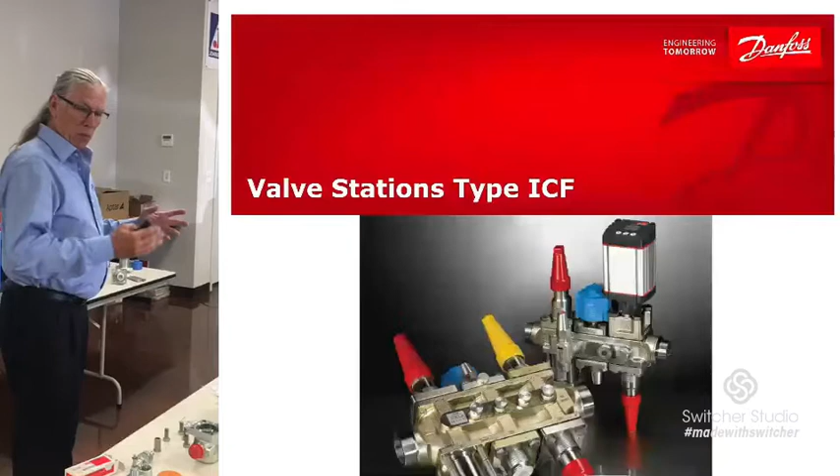Sometimes they call it modular block valves. We call it ICF valve station because it's Danish - there's something in Danish that those letters stand for. Somebody tried to make up something that makes sense, but to me, integrated is a good word because it integrates multiple functions all into one. But ICF valve stations is the best I can tell you.

So how does it work and why do we do it? Well, simply put, the normal would be all of those components with either flanges or threaded or individual connections, typically with ammonia and CO2, all the way across there. So how many leak points do you have there?

And then down below is our ICF valve station. You've got the modules that are bolted in, and then you've got two weld connections to put the valve body in. So although you have other leak points, you eliminate with the two welds - you simplify it and hopefully eliminate the two basic ones you want to eliminate.

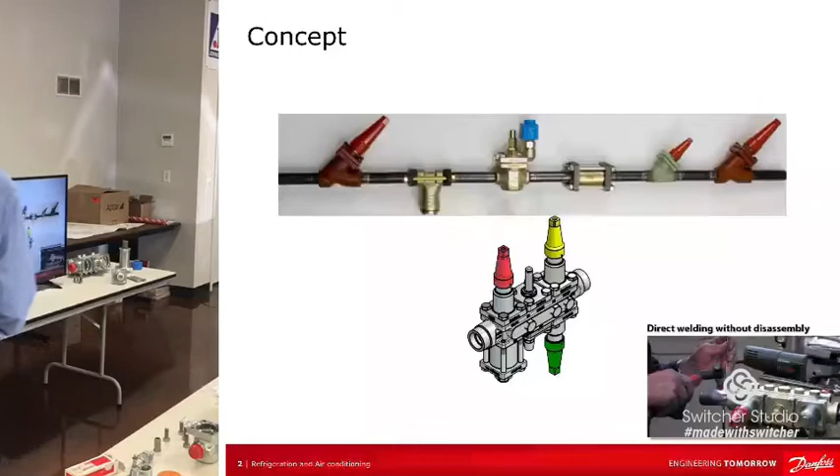Then yes, you could have a leak from a module - that is possible, but it's easily replaced, a gasket. It's really actually rare in my opinion, if everything's done right and put together correctly. So that's the concept.

So here is our family right here. The smallest, the 15, then the 20, the 25, and that's the metric, so you're talking 3/4, half inch, 3/4, 1 inch. The 50 is essentially 2 inch, and the 65 is essentially 2.5 inch.

Our two largest ones, the 50 and the 65, have been introduced recently. Keep in mind that is the module port size, so the connection sizes can be different for each one - can be anything from a 1/2 inch through 3 inch connections, depending on the particular one and what you're trying to do, within reason. Obviously you're not going to have a 1/2 inch connection on an ICF50. It's not happening. So you get the gist of that.

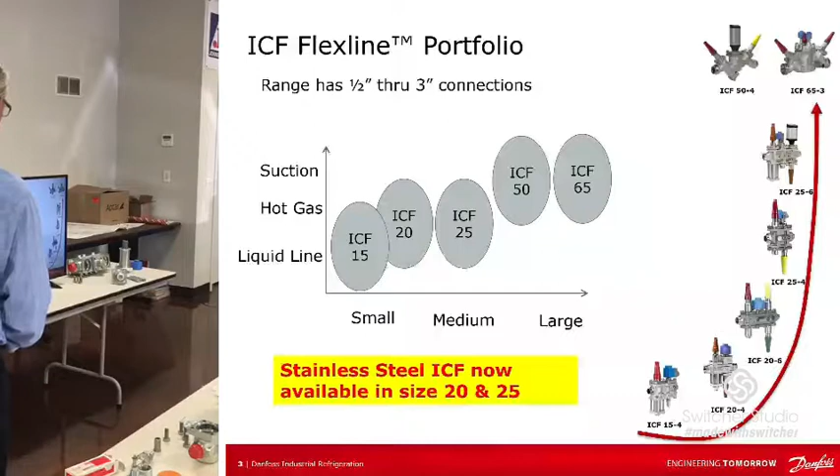Here is just the flow and the side port locations. I have one up front here around lunch area - it would be best to look at around lunch because it's so big. I'd encourage you to look at it if you want, but I'm not going to pick it up or bring it to you. It's just too heavy, but you can see it from here.

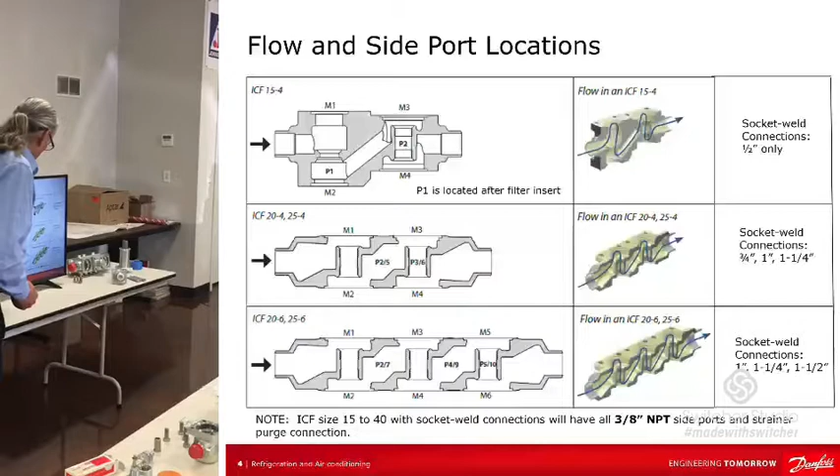What I have over there is an ICF 25-6, which would be this particular one right here. It's the most common in large jobs that I see, and you can see the flow from inlet to outlet. The odd modules are on top - M1, M3, and 5. The even modules are on the bottom - M2, M4, M6. If that was just a 4, then it would be M1, M3, and M2, M4.

It's that simple. The side ports there are called the P ports, and it shows you kind of where they are. In most cases, the P ports, the side ports, are going to be in between modules. Occasionally, one of them will be at the module.

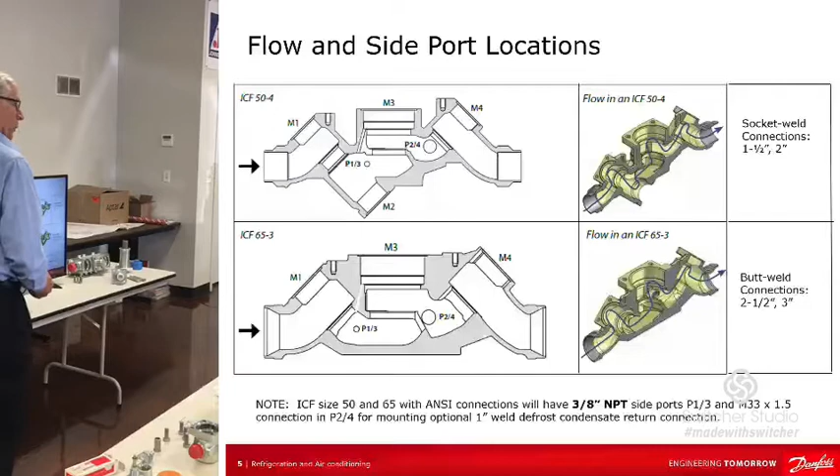And then the large 50 is up to 4 modules, and the 65 is limited to 3. So just as an example, this is typically what happens - here on this one, which you can't have here, you can add a filter strainer to the M2 location. Here you would have to have a separate large strainer for the 65.

Starting with the small ones, the 15, it's kind of a morphed body - you can see it kind of looks a little weird there. The size of it required that, and the fact that we're trying to use some of the same modules from the SVA line, just in this particular case.

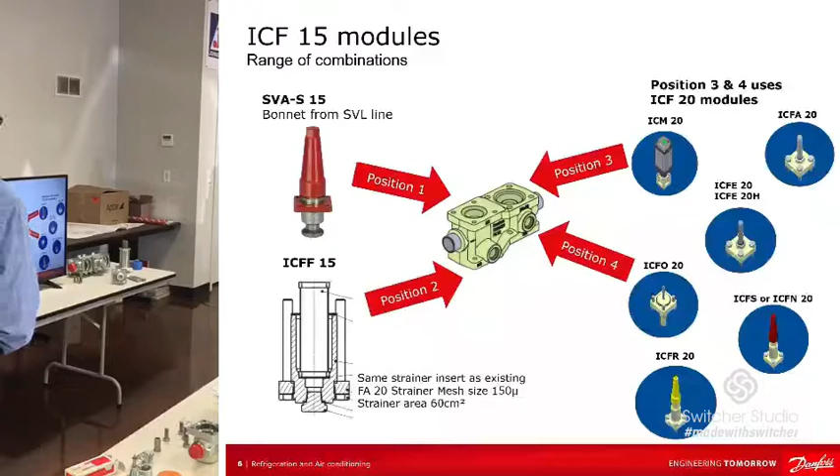But the point is, on the 15, you can have a stop valve, and you can have all of these others. The nomenclature is pretty simple - so a stop is an ICFS, S for stop. Then you've got ICM, Motorized Module, we'll talk about that one later - that's a separate item in our line. We've got an ICFA, which is a solenoid.

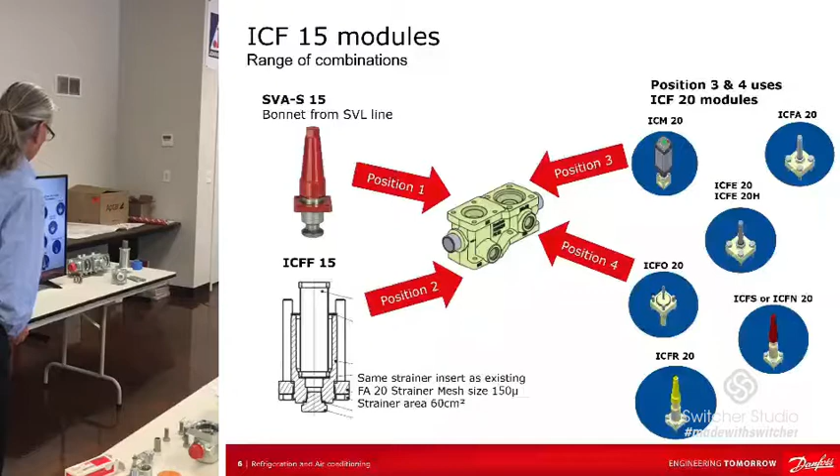That's a pulse, then ICFE is a solenoid. The O is the manual opener. S and N are stop and stop check. And then ICFR is a regulator. So that's what can go into this particular one, the 15. And you can see how they do have to go in specific locations in many cases.

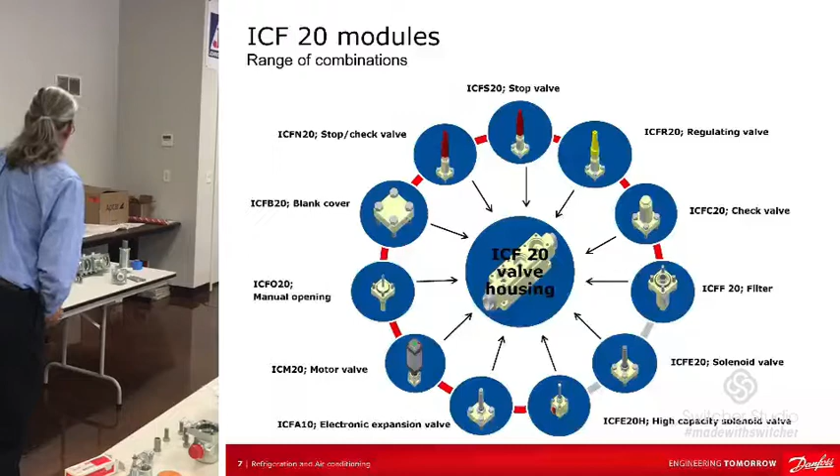Then the 20 just increases. It's got a few more that we didn't talk about, I'll try to point those out. Here we go, high capacity solenoid. We do have the filter in the other one. Check valve, okay, so that's another one. Check, ICFC, and everything else, and there's another one, a blank.

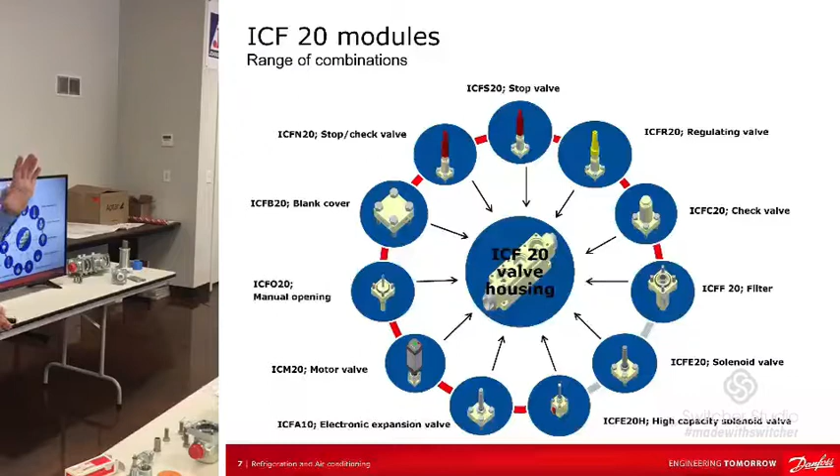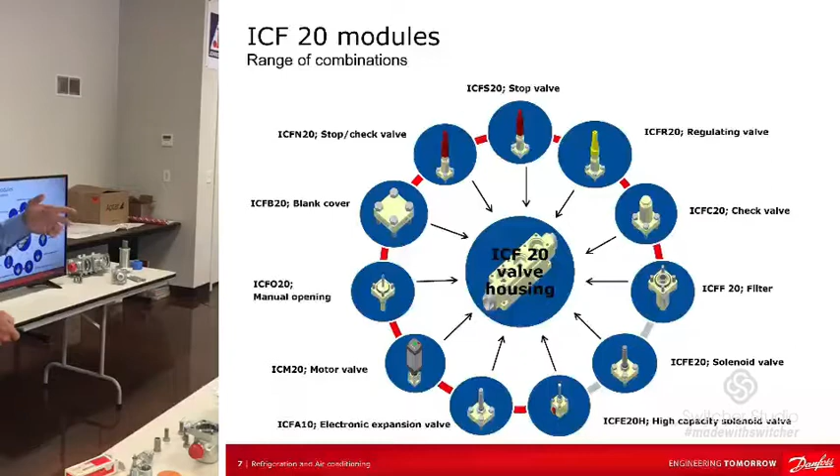Okay, so let's say you need 5 functions, you just have to have 5 functions. Then you're gonna have to use an ICF 20-6 because we don't have a 5. So you're gonna have 6, so just put a blank cover in where you don't need the functionality.

And the 25 - we used to have what was called a 25-40, the 1 inch. Remember I said the connections can be pretty much what are needed within reason, so we did away with the range between 25 and 40. I need our slides updated, but suffice it to say today we only have ICF 25. There is no such thing as a through 40. It's basically the same because we give the variable connection sizes, and the port size is always going to be the ICF 25.

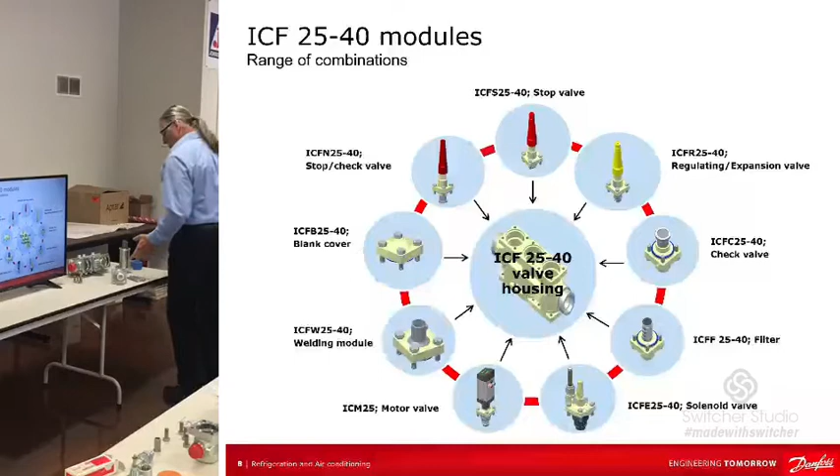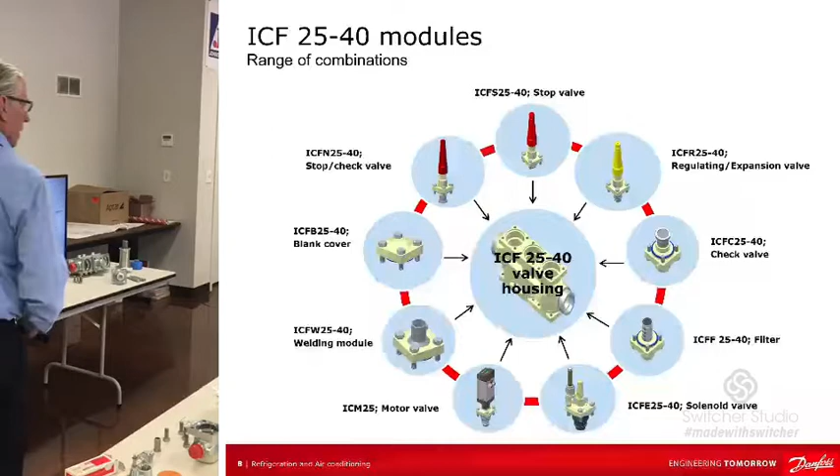Here it adds another one. So you see this one, this one's pretty interesting, but only for the 1 inch. It's called a welding module. It's pretty cool. If you think about it, let's say I were to put on the outlet, which is this end - because this is socket weld, I could put an outlet here. I could also put an outlet up here, and I could pipe away from that thing and do something. I've got an example of one. It's pretty crazy, and people do all kinds of stuff with them. So it's just a way of bringing the refrigerant out at a certain place on the ICF valve station.

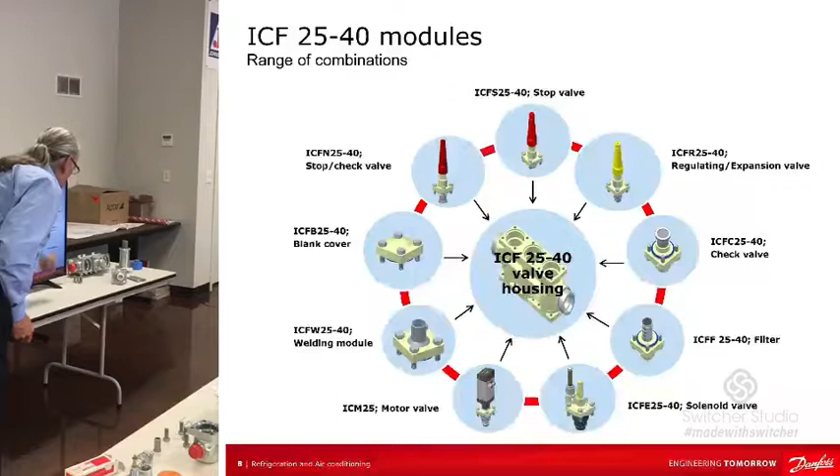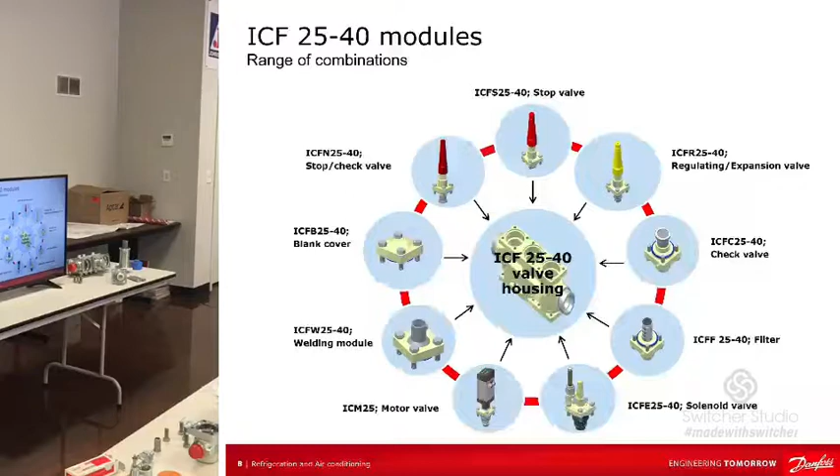Oh, the one I told you about, the unique 25 solenoid - it's the one with the armature to the side. The reason for that is the size of that valve and the fact that the manual opener comes built into it. The other solenoids have the valve in the solenoid at the top, so the manual opener goes down below it, and you can't put that anywhere else. I've actually gotten that question before from the field - can I put the manual opener anywhere in the valve station? I'm like, no, you've got to put it underneath the solenoid, otherwise it won't work. So just something to know.

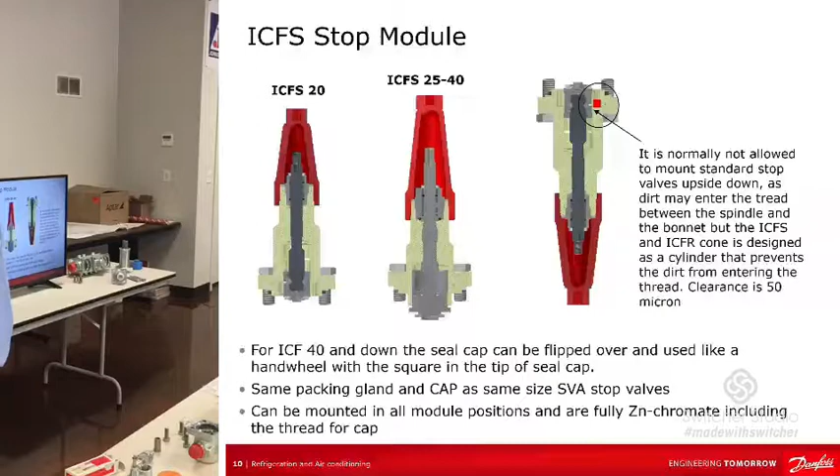You might ask about these modules for the stop valve - they're unique to the ICF valve station. The ICF15 is the only exception to that, but the reason for that is because you can mount this upside down, and we typically don't want valves mounted upside down. So in this case, this is a special valve with a specially designed cone, not like our standard stop valve. It does use the same packing gland as the SVA line, but the valve itself is not the same, so it can't be substituted. So what I'm saying is this is an ICF stop valve, and it has to go in the ICF valve station - it can't go anywhere else.

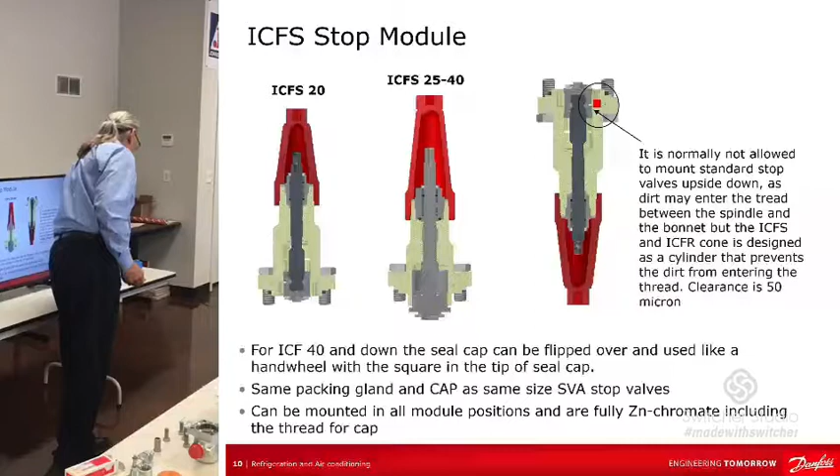So regulator, okay, it's again, same packing gland. We talked about V-port regulation.

That's how the regulators work throughout our family of valves, pretty much. Can be mounted in any location. Regulators are typically, that's the way it works with ICF. Regulators tend to be at the end, generally, that makes sense. And stop valves will be at the beginning, and if you're not doing stop check or a regulator, it'll be at the last position, just to make isolation of the module, of the valve.

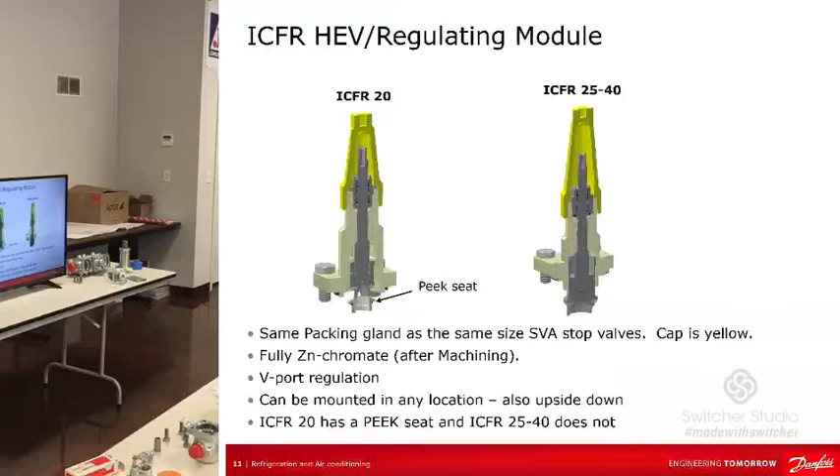Let's see here. Seal caps, we don't need to cover this because really I've already talked about it. They just need to be, we like people to use them, put them on. I see them on the roofs, usually they're upside down, they're all over the place. It's just best to have them on, tight, nice and tight, and kind of keep up with them. There's a torque related to those caps, and that's in our literature.

Okay, we talked about reversing it to use it to drive the valve, and the color coding of it. The filter modules, we have two: a standard and an extended. Today, pretty sure we've gone standard with the extended module in the ICF valve station. It's something that we've done, and like I told you earlier about the pleated, we standardize on pleated in certain applications. We recommend it and standardize on it.

Okay, so there's a drain plug. It's a 3/8 inch NPT. So typically what we see is that they would get a 3/8 gauge, or valve, gauge valve, or purge valve, and they would use that and install it into that, so that when you isolate the valve station, you want to clean the strainer, you're going to purge after you isolate, and then you're going to take the strainer out.

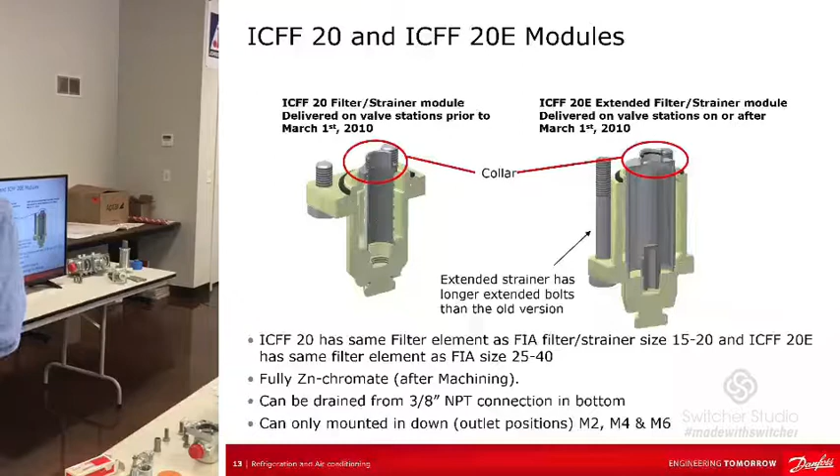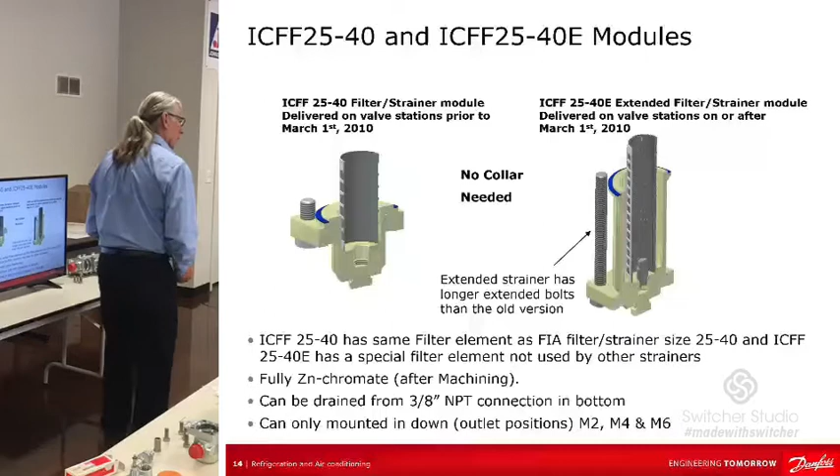Can only be mounted in the down position. We already talked about that. And you can tell the extended, I forgot to mention this, but you can tell the extended filter, the bolts will be long. On the standard, the bolts are going to be really short. You can see that in the picture right here.

Okay, and I'm not going to go into the micro details of sizes and parts and all that stuff. It's more, just knowing that it's stamped on the side, like I showed you, what they look like, that we have standard and pleated. Those are the things that I think are important for you guys to know.

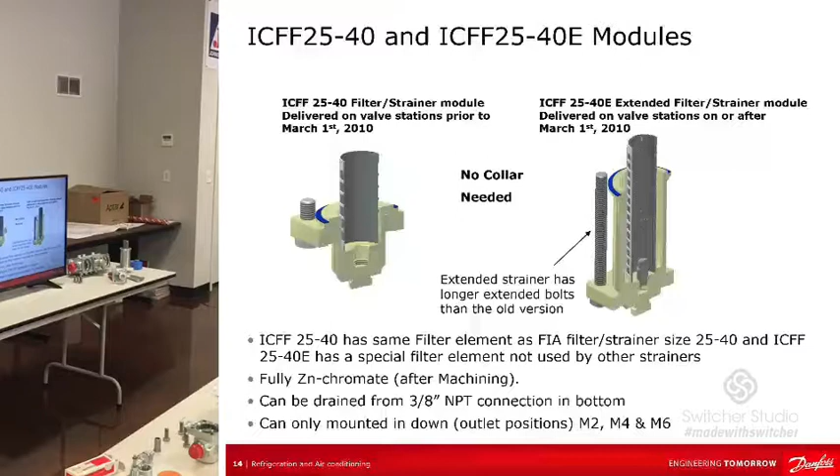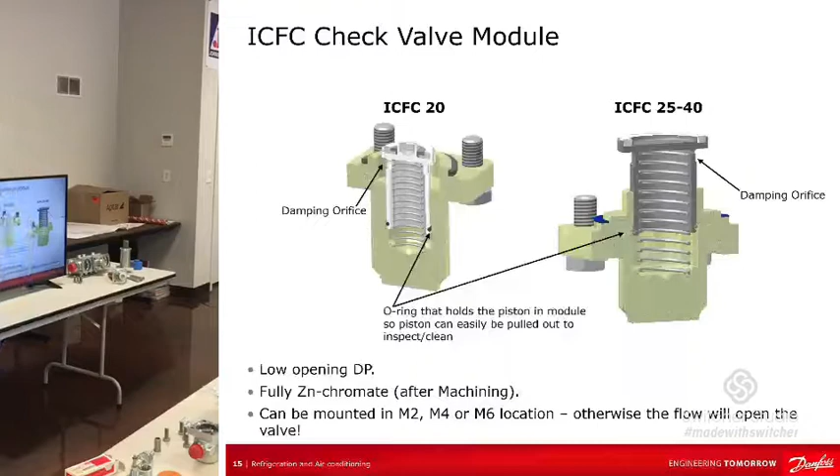Check valve is very similar to the CHV and the SCA. You can see that, the piston, the damping orifice hole, the spring, all of that. I mean, it's pretty much the same. Low opening differential pressure, just like the CHV we were talking about, almost a half a PSI differential. Again, mounted in M2, M4, or M6. Otherwise, the flow is going to have a tendency to open that check valve, and that's not what you want.

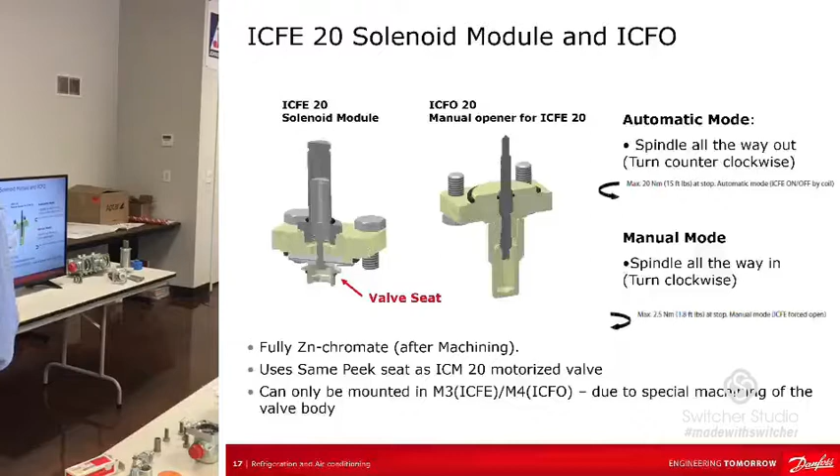And you see the automatic and the manual mode there. It's the standard, this is kind of unique. If you ever run into one of these, I get people who either like these things or if they don't, they hate it, and I don't really know why.

It's a high capacity solenoid, so it can be used with the ICF 20. It's unique in that it has a built-in opener, but it's not like the one on the 25. You can see the side picture here. It's a red colored cap with a gasket underneath it, and when you screw that out, it uncovers an Allen head.

The two things I hear are: now I gotta have a hex wrench with me to operate that thing, and couldn't you have put something there you could just take your hand and move? Well, the reasoning is you don't want it to be operated that easily. You want somebody to be doing it for a reason, it's a tool thing. It's just the thinking of an engineer designing this, I guess.

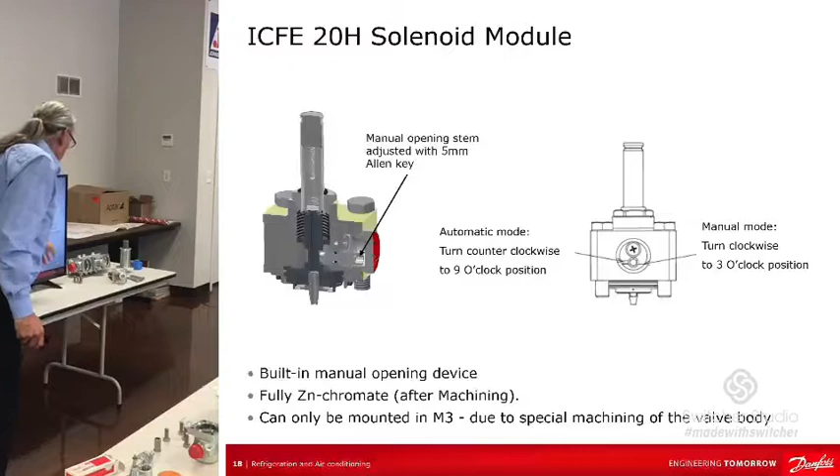The other thing is you can easily break that thing. It only turns to the 3 o'clock position, so it's at the 9 o'clock position when in automatic. To do manual, it's clockwise to the 3 o'clock position only. So what'll happen is if you get in a hurry, put your hex head in and just twist it, well if you're a strong fella, you're gonna break it.

Unfortunately it's happened, we see it. It doesn't take much. You can break, and I don't mean the hex head, I mean break the internal manual opener part. So now you know what you're gonna have to do, you're gonna have to replace the whole module. It's happened, just be aware of that.

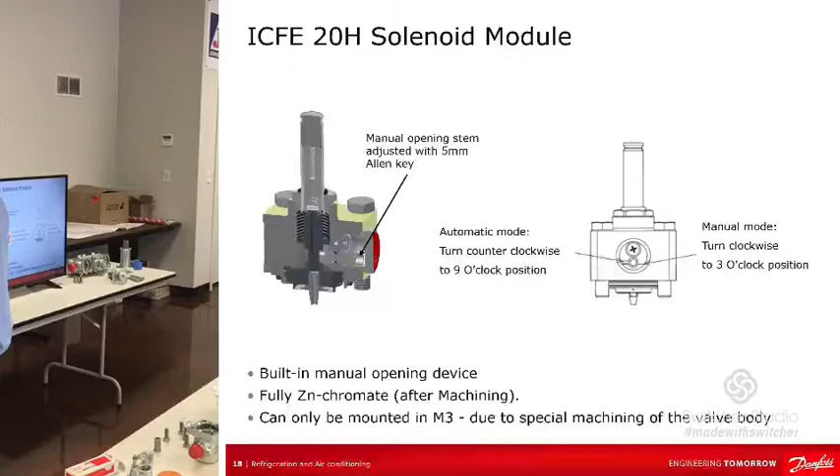Again, this is a solenoid module, so it has to be mounted in. That's one thing that's common throughout this. There's the special one we talked about, it's backwards, okay, just keep that in mind. Again, only M3.

In a way it is, because you can see that the solenoid is off to the side, it's kind of a pilot operated type arrangement. It's not direct acting, it's pilot operated.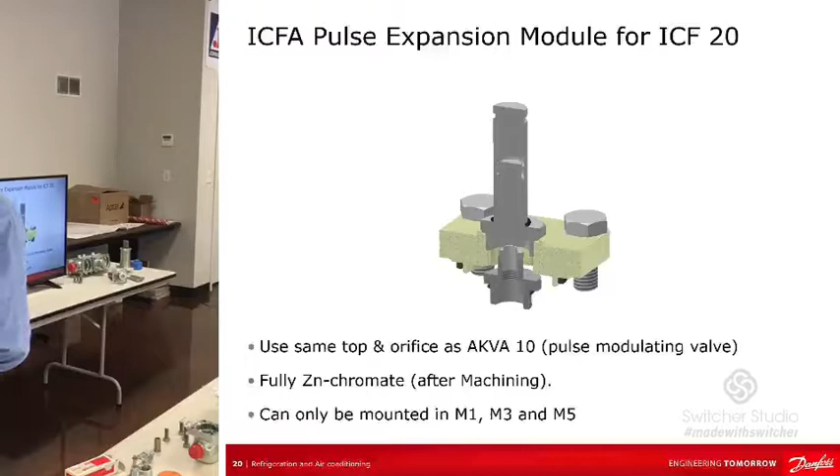And this is one we haven't talked about, but we'll talk about it separately shortly after lunch, the ICM motorized valve. So what's unique about our valve station is that there's so many different things you can do, including looking in the future to being able to do ICS on the small ones. And I haven't talked about this, but there's limitation of what you can do with the 15, 20, and 25 valve stations with ICS, okay.

So ICS pressure regulators, but you can do those across the board with the large ones. The 50 and the 65 are very flexible. They're working on the small ones, there's just some challenges. Really, I think one day they're gonna come with it.

So it's gonna be pretty neat because a lot of people like the fact that we can also do the motorized valves on the valve stations, and it is pretty cool. Because let's say you're wanting to do liquid injection on a compressor. That's common with compressor manufacturers, they really like using that valve station. It has everything they need in a motorized valve to feed the liquid. It really is nice, and typically those don't get very big generally speaking.

So it's working today, but there's a lot of applications where having regulators for the small would be good, because we already have it for the large ones.

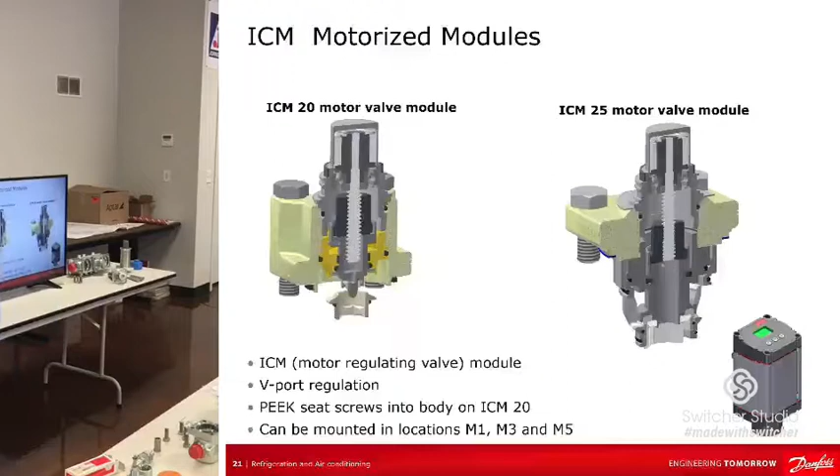Okay, this is one that you may not see, and you may not ever see it. I don't know, but I'll do it real quick because I want you to be aware of it. It's brand new, it's only been out a year or so. It is a defrost float module. It can only be used in the ICF valve station, and it can only be used in the 15 and the 20. It's not in the 25 today.

Okay, it's designed on a mechanical float, you'll see that in a minute. It's got a built-in bleed to bypass gas. It has a very high capacity, so we're talking in terms of system capacity, not defrost capacity really, but system capacity, about 55 to 60 tons, okay, system.

So that's pretty good. It's got a manual opening stem that's actually similar, on the back side here, and you'll see it's similar to the ICFH high capacity solenoid. It's a little cap with a red cover. It's actually very similar.

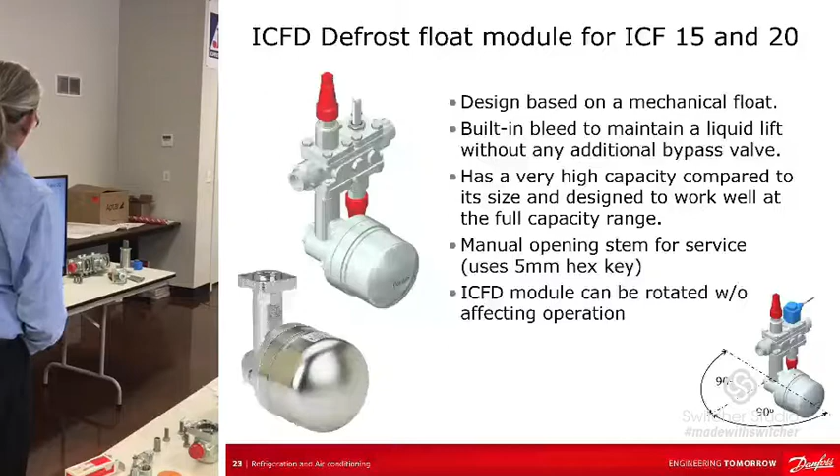And in the picture here, you can see that you can have an ICF-4. You got a stop valve, you got a float drainer, you got a solenoid, and you got a stop valve. So what you're going to do is the stop valves are always going to be open, and you're going to engage the solenoid during defrost. It's that simple. So when you're out of defrost, you de-energize the solenoid. You'll see in a diagram here in just a second.

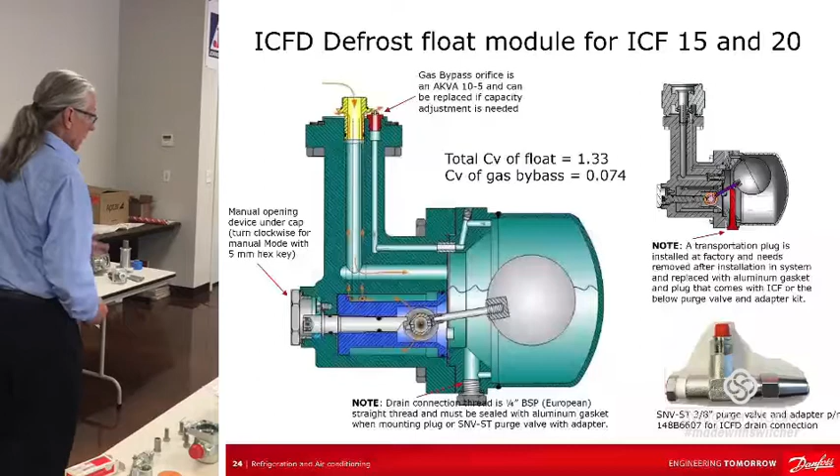So the feed from the condensate out of the evaporator is going to feed down into the center, go into the float chamber, and the float is only going to allow liquid here on the outside of this to come out. Any gas up here is going to be controlled by an orifice, so the bleed of the gas going back to the system, the liquid separator, and then ultimately back to the compressor is limited to a very small amount percentage-wise.

The idea there is that any gas in defrost, if you're sending gas back to the system to recompress it, that's energy loss. There's no savings at all in that, because the compressor's going to recompress gas that's already been through the process, and it didn't do any good work in the evaporator to defrost. So the idea is you want that to be minimized. That's what the float drainer does, is it forces only liquid to pass.

And the only reason the gas port is there with the orifice, which by the way can be sized and can be changed, is to allow the siphon to take place. Otherwise, maybe it wouldn't work quite as smoothly. So allowing the gas to bleed is what actually allows this thing to work.

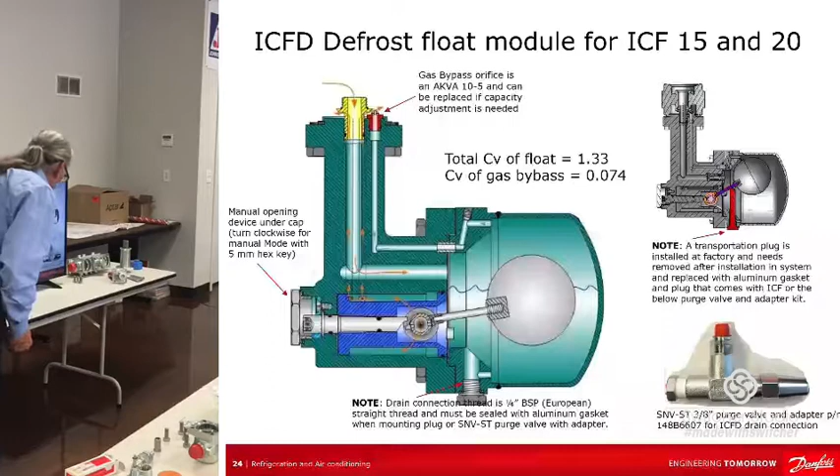The key to this, one other thing, is that you can have a purge down here at the bottom. So when this thing is shipped, there's a plastic plug in here that's screwed in, and there's a tag fastened onto it. The reason for that is it puts the float in the up position to keep it from being damaged in shipping.

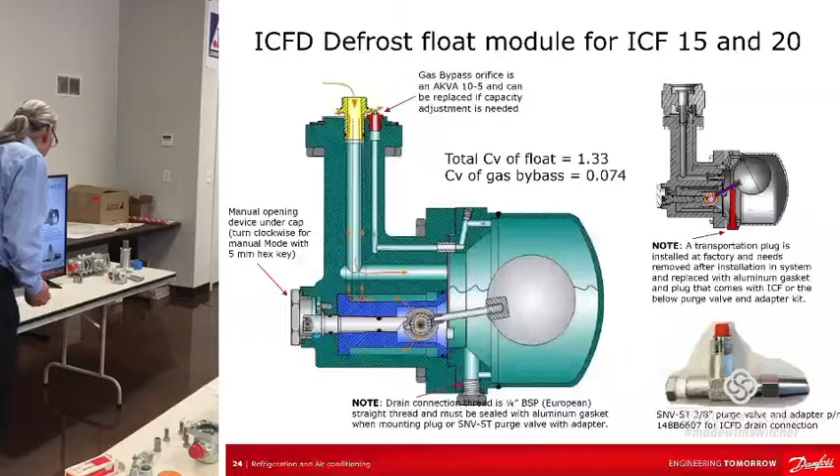So if you don't take that out, guess what? Your ICFD is not going to work. So you take that out, you put a fitting in there and put a purge valve, or you just put a cap. But most people put a purge valve, that way they've got control of that.

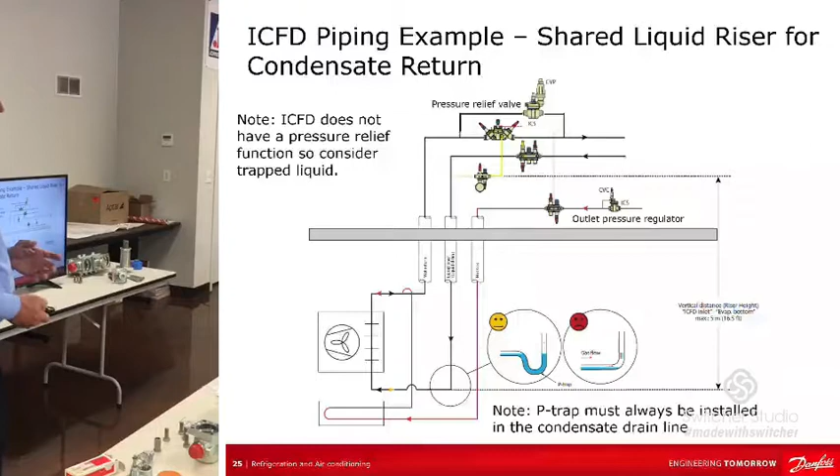Here's just a simple diagram, but take note, it's advisable to put a trap here in the condensate riser. And also there is a limitation of the ICFD, and it's not a problem in Europe from what I'm understanding, but I go to a few job sites where, because of the configuration of the job site, that vertical lift is more than 16 feet.

And if it's more than 16 feet, it will still work, but in a limited fashion. So it kind of doesn't make sense to put it in, because it's going to work in a limited fashion - you might as well just use a drain regulator, honestly. So that's being looked at and worked on, but it is 16.5 foot vertical lift maximum. You want to be inside that, less than that.

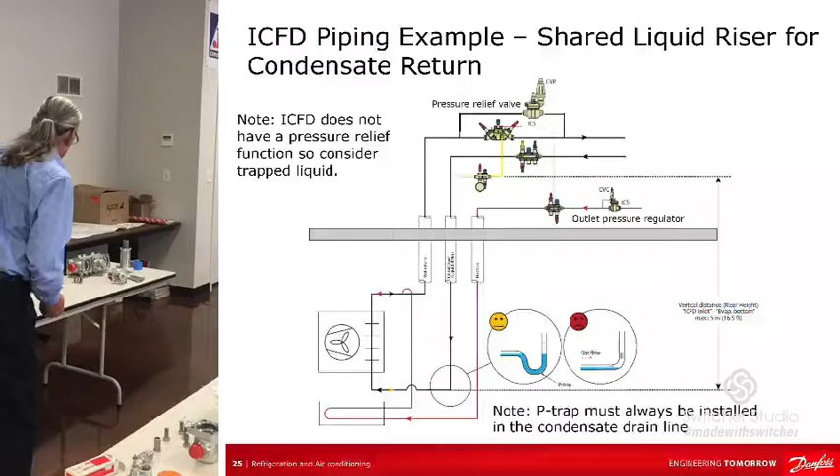This example here is a shared liquid riser, so you can see that the condensate's coming up into the float, and then it goes into the side port of the ICF large valve station, and is returned back to the wet suction. That's that one example, okay?

Then the other example would be where you have 4 pipes, okay? So you have hot gas, you have liquid, you have suction, and then you have a separate drain condensate line going through that, and then that's going to either go back to the system. So it's typically going to go into the side of the ICF valve station. It depends on what they want to do, but that's where we would like to see it go.

Because during defrost, see, that's going to be closed. The side port, though, is going to be open to the wet suction, and the condensate's going to go in there, defrost condensate's going to go in there. So that's just kind of an example of what that would look like.

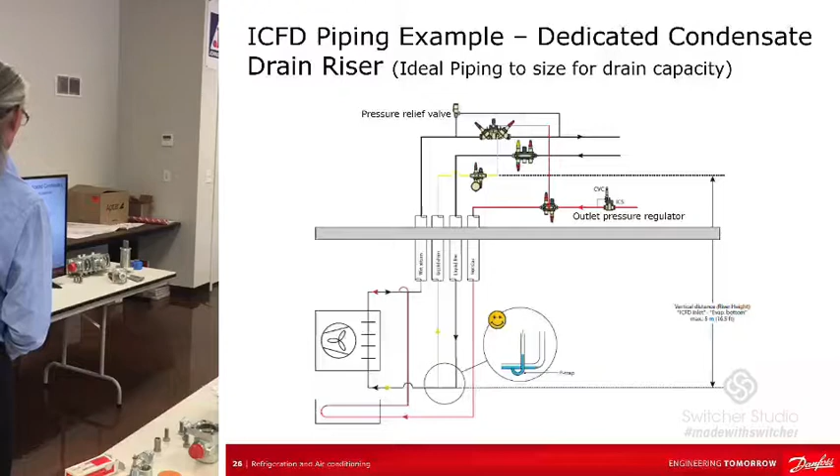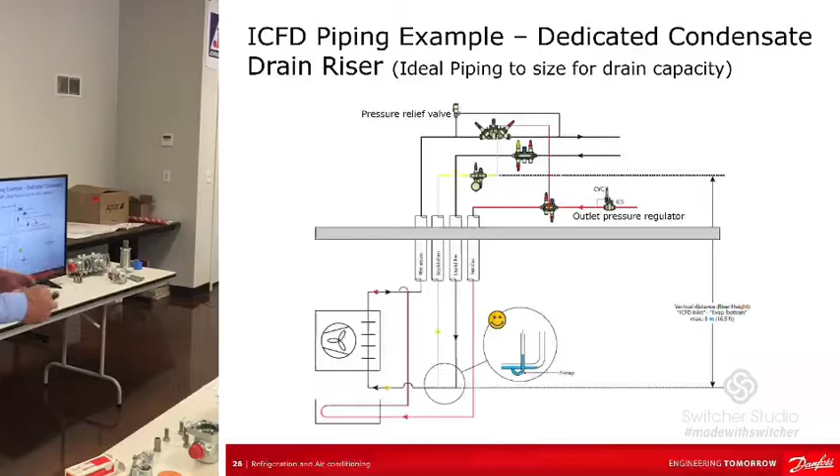So you've got a hot gas regulator here, you've got liquid, and then you've got suction, all in ICF valve stations. I see this a lot when I go to job sites, and it's gratifying to see it in real life being used actually quite a bit. I generally get positive comments because it's just so much cleaner and easier to work on, and if it's installed well, it's easier for you guys to get to it and work on it. It's not spread out all over the place, and you'll see that in some example pictures here in a minute.

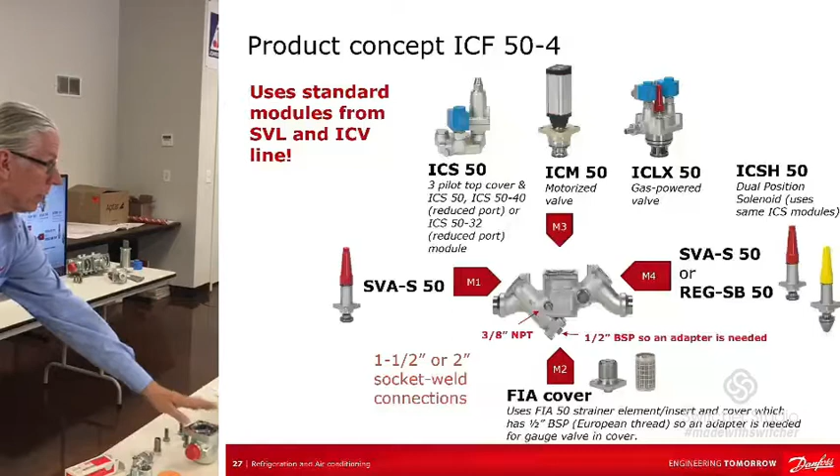Here I want to just reiterate the layout and the concept of it. It's really nice. So I've got an ICF 50-4. You could have a strainer down here, as we talked about, and then you're typically going to have a stop and a stop. In the middle, M3, you're going to have a variety of things. It could be the ICS pressure regulator, it could be the ICM motorized valve which I haven't talked about yet, it could be the ICLX suction stop that I did talk about, and it could also be the ICSH, our new safe or soft start hot gas valve.

So this I see a lot today, and it's pretty cool to see it being utilized with a variety of things being used. The most common that I see in suction is ICM and ICLX, and of course ICSH generally only in hot gas - but I like this gentleman's question here and I'll look into it. You could use it in liquid if you needed a 2-step, so I need to make sure of that, but I'll try to feed that back through to the IRP guys once I find out, because I don't really know.

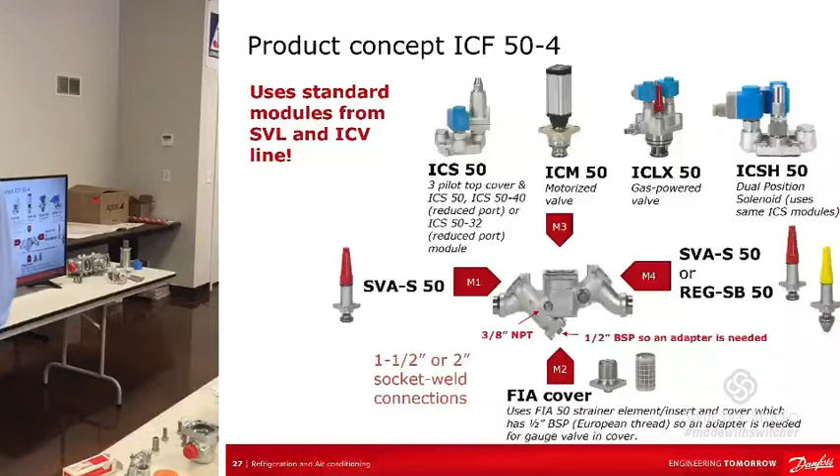And then the 65, the only difference here is the size and the constraint of the filter module - you can't have it, it's just so big, these things. With this 65, if I had one here I'd have to have a crane to pick it up. It's just so big, it's hard to manage. The 50 is big too - I mean, you can imagine carrying that around in a Pelican case. Yeah, that's no small piece right there.

Okay, so I didn't say this before, but you can use regulators in that last position. It's not common, but you can use a regulator there. Generally what I see is a stop, and then some function in the middle.

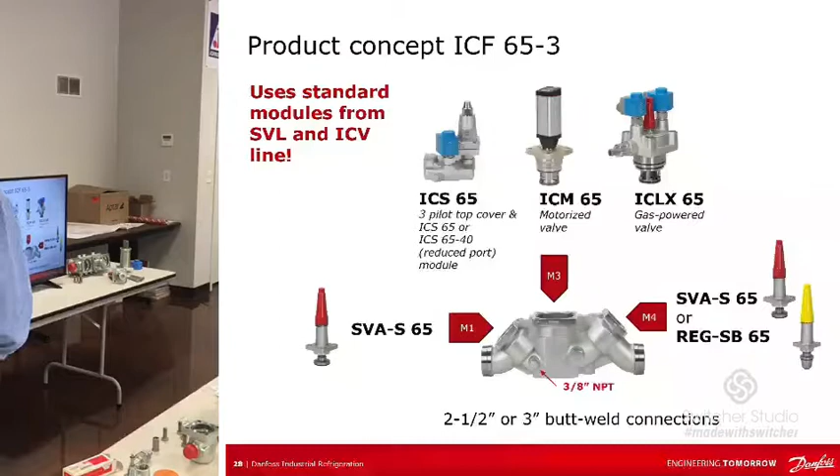Accessories - we touched on this a little bit because it's a similar connector. Here's your defrost drain connection for the 65 and the 50, and it goes in that large port. There's a small side port and there's the large one. That's NPT, that's G, so you're going to have a gasket and an adapter. But it's really nice to use that for condensate return, and it's used a lot.

We did have an issue with that cap, that plug, whatever you want to call it, on the large port, and I discovered that just by accident. It's not always used, so I guess a guy down in Florida had a big job and he used it over and over and over again. He had to take that valve station, unfortunately, to an industrial shop that had impact wrenches that would operate up to 300 to 350 foot-pounds - it was the only way they could get that thing out.

So what happened was I went back to the factory, and it was just a matter of them not lubricating that in production when they installed it. So if the torque is, say, 150 foot-pounds to install it, you would expect the breakaway torque to be less than 150 pounds, and it should have been. Well, it was twice, almost 3 times as much because of what we discovered. And the minute they did a slight oil or lubrication on it, the problem probably went away. So if you run into that out in the field, it's been fixed, but if you were to run into that, just know it will come out.

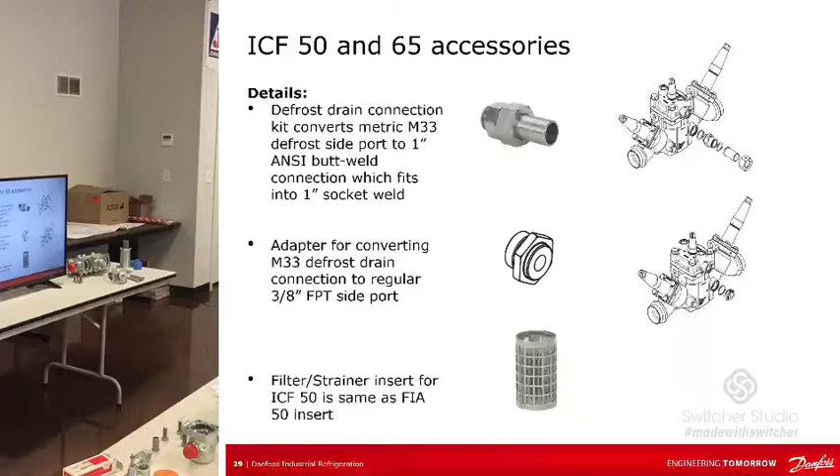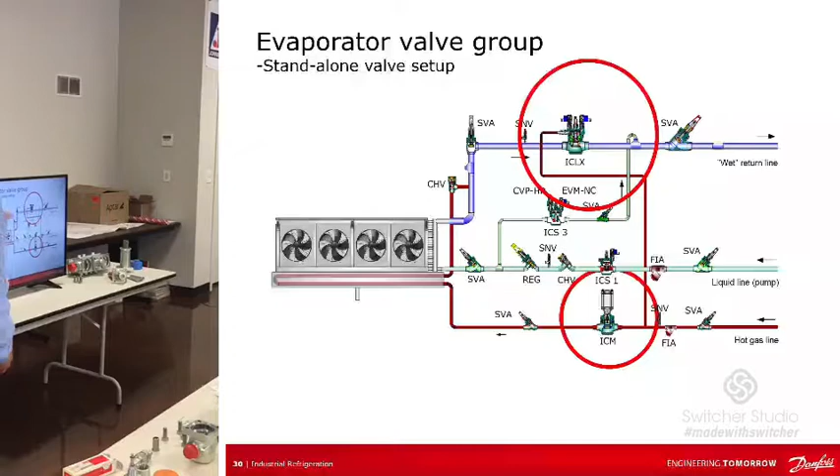ICM. It's not used for hot gas a lot. I think now we're doing more of that step valve. And I see the ICM on suction now actually a lot. And then here's what the valve station does for that. Kind of cleans it up a little bit and makes it look really nice.

And of course, this is without the float. It's using a drain relief regulator. We talked about the standard STD version for that.

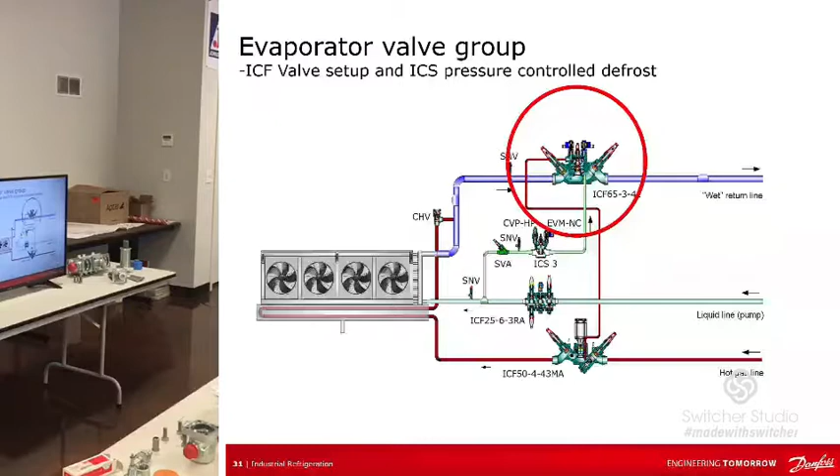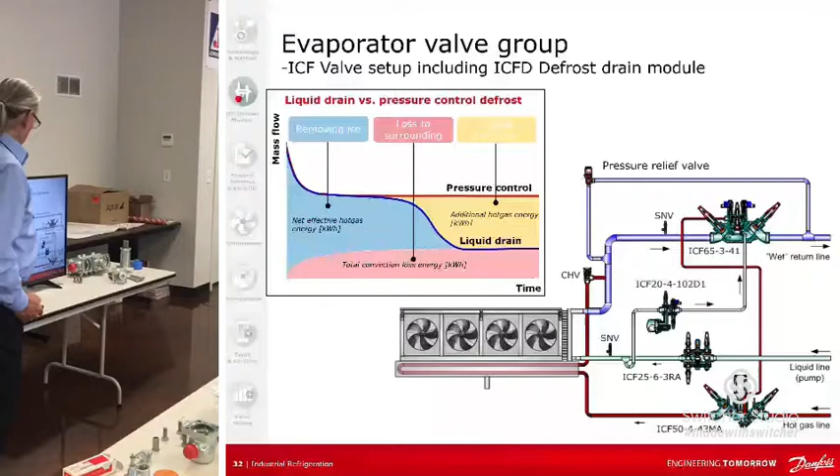So here's your valve stations. And this is the ICFD, the defrost drain. It just shows you, okay, so if you use a pressure regulator, pressure control, what's going to happen is your defrost is going to continue, and it's going to return a lot of gas at the end back to the system. Here, the liquid drain is limiting that and only allowing liquid. Okay, so at the end of defrost, it's saving energy, basically.

That's a picture of what the float drainer does for you. It equates into energy savings, absolutely. The compressor's not going to work as hard. So...

Just some applications that are popular. Liquid injection on compressors, with ICF, like I said earlier, with ICM motor - it just cleans it up really nice. It's super nice. The compressor guys we work with, you'll see that actually used quite a bit on some of them.

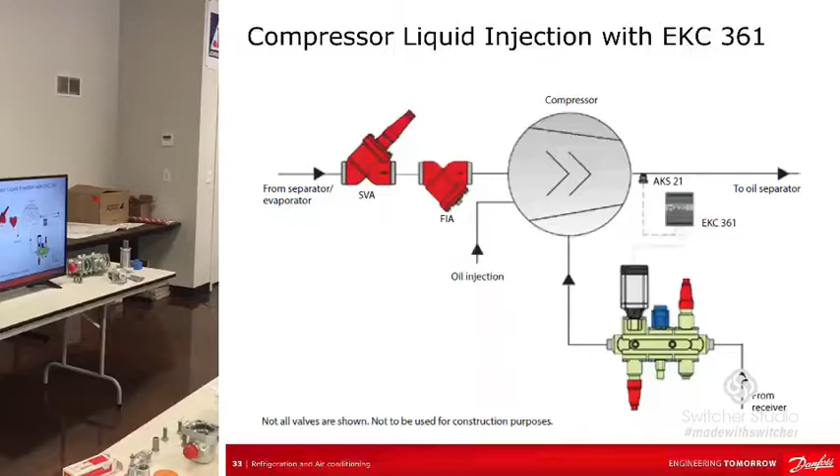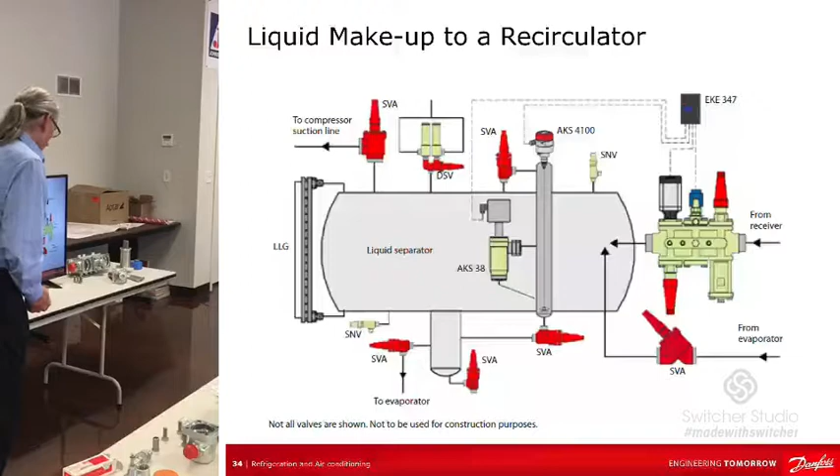Then a makeup to a recirculator, liquid separator. You're basically feeding in from the receiver to the liquid separator with an ICM valve station. You've got either an AKS 38 level switch or an AKS 4100 level sensor, or both, depending on what you want to do, controlling through a level controller. After lunch, we'll touch on this stuff a little bit. But you can see that the valve station is there, and otherwise you'd have a whole bunch of stuff singularly. And it cleans it up really nice.

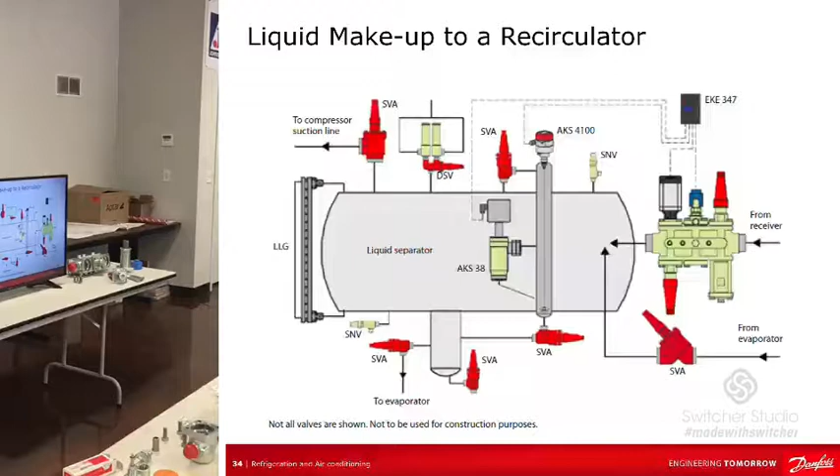You got a solenoid where the solenoid can close and stop it, or the solenoid can open and the ICM valve can modulate. You can't see this, but I just want you to be aware of the ICF nomenclature so that you understand it. So when you look on the side of an ICF, you can come up and look at this one. It's heavy, you can move it around. It'll have a silver label on it. It'll say ICF. That one will say 25, so that's the size.

20 would be 3/4 inch. 15 would be 1/2 inch. So 25, and then dash, the next number is the number of modules. So it'd either be a 4, with the large it could be a 3 or a 4, but with the small it's going to be either 4 or 6. In this case, that one's a 6.

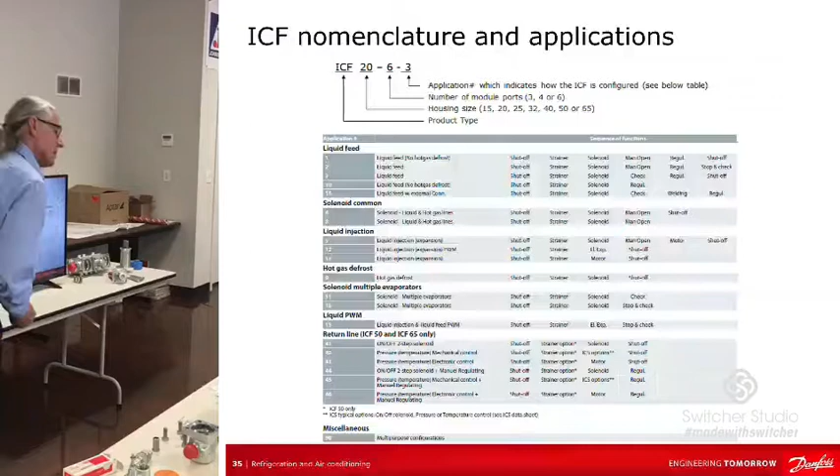And then the last number is the one that's not as easily understood, and you got to know a little bit to understand it, and that's called the application. So you can't see this up here, but the most common that we see would be like liquid feed with defrost, so that would be a number 2. Or let's say liquid injection would be 5. Hot gas is a -9. So a hot gas valve station application would be a -9. That means it has these functions in it that are listed.

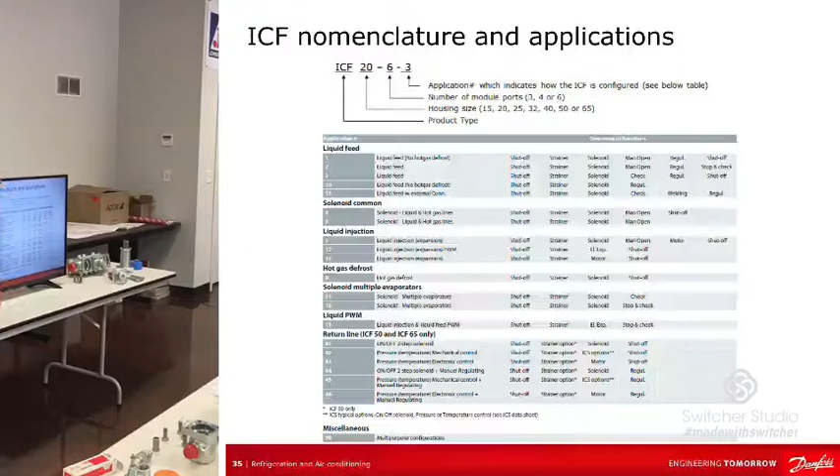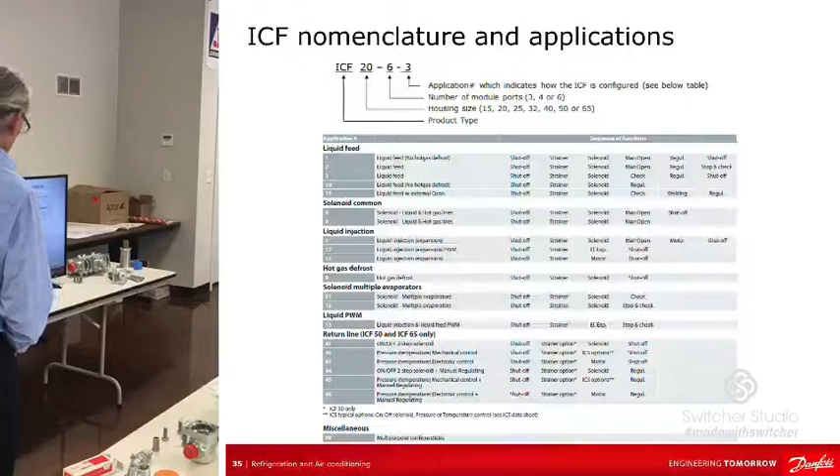So we standardize, and eventually we can do custom, but we typically don't, because generally it comes down to specific application. And there's lots of application numbers, but here in the US we only use certain ones. In Europe they use different ones. But in our literature it'll basically tell you what it is, okay? 41 and 42 are return, like I'll show you on a slide.

Okay, so this breaks it down. Application 1 is without defrost, so it's a liquid feed. So you see you've got a stop, a strainer, a solenoid, a manual opener for that. You got a hand expansion and you got a stop. Okay, so the hand expansion is your control. That's a pretty common one without defrost. Then when you have defrost, you're going to come down here, you're going to see you got a stop check there instead of a stop, okay, so that you prevent that backflow. The difference in the next one is just a stop valve and a hand expansion valve. Okay, so there's a lot of varieties.

Here is the hot gas I was talking about. Okay, so it's generally going to have a solenoid, stops and a filter.

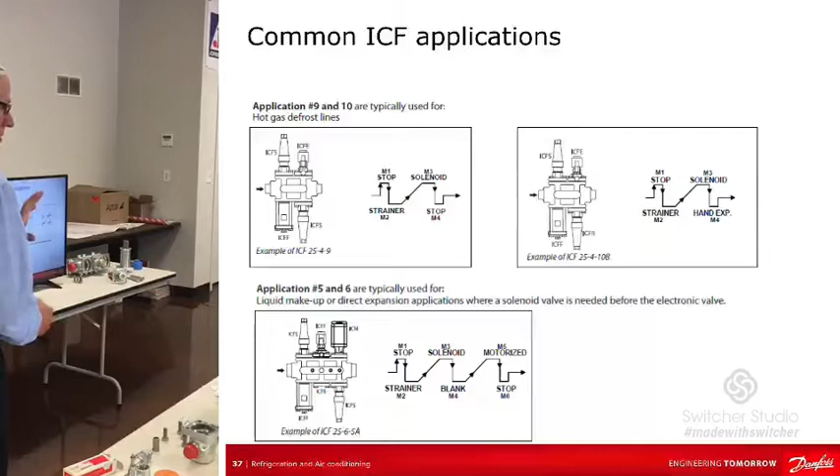And then application 5 and 6 were what we looked at on that liquid separator from the receiver feeding. That's going to have an ICM valve on it generally, in most cases. So you can begin to see here, there's a trend: you're usually going to have a stop and a filter, not always, but a stop and a filter and a stop, and then in between you're going to have your functionality, whatever it is you're trying to do - regulate, or solenoid, or control with an ICM valve.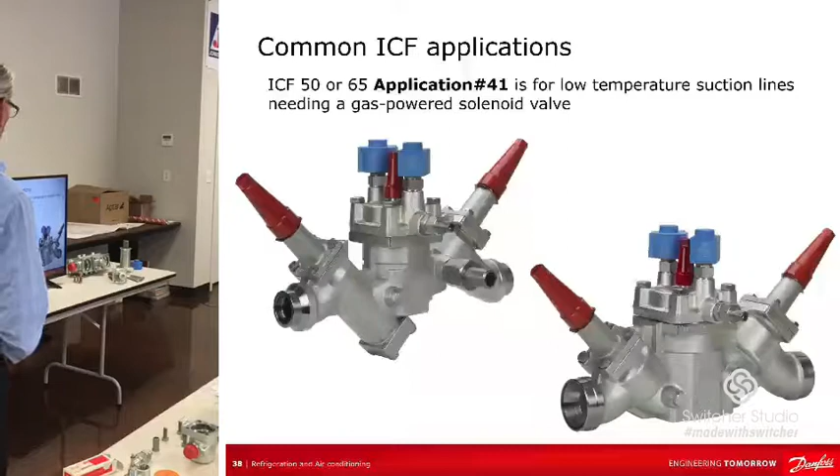Let's see here. So, and that's again, I'm getting redundant here, but I want to make sure. So here we're able to do the gas-powered valve, the ICS control, in the large 50 and 65. Today we cannot do that in the small, the 15, 20, and 25. I think it's coming - it's being worked on in Denmark, and it's hopeful that we'll get there. It could be really good.

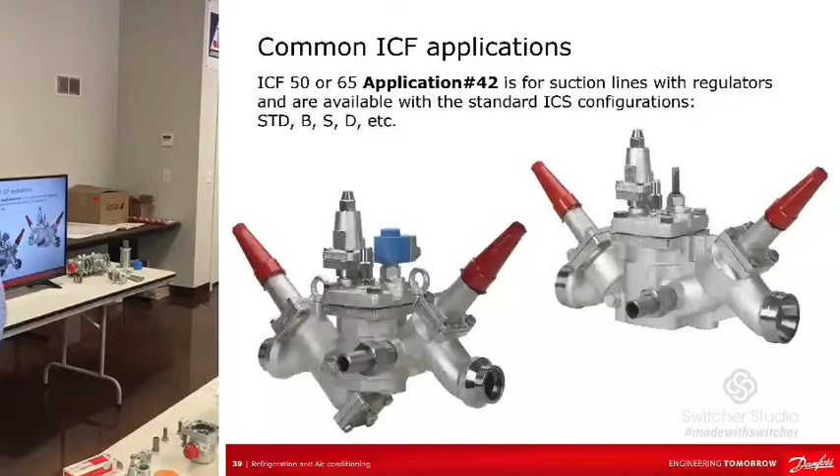And so here's application 42, which is a regulator, suction line regulator. So you can do all kinds of those configurations that we talked about. There's 20 of them, and ICM valve - we'll get back to that singularly, but again, control could be used in the suction line. And, you know, without a strainer or with a strainer in the ICF50.

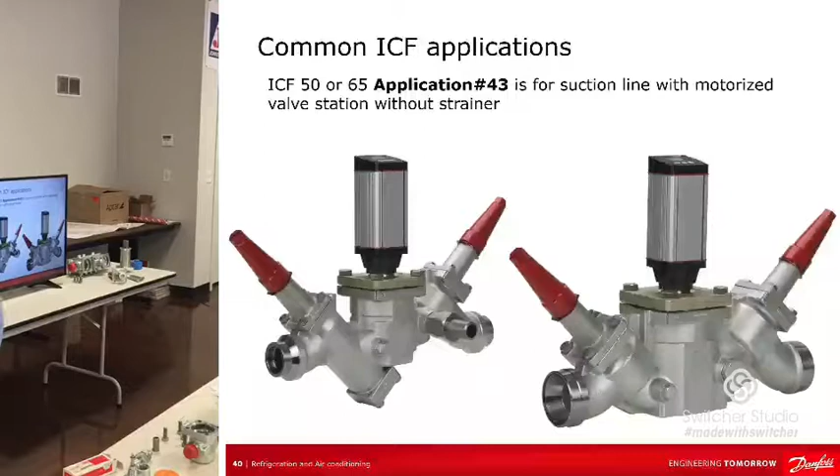Ordering - just know this, it doesn't come with coils or the actuator, okay? We haven't covered this yet, but this is the ICAD actuator for the ICM valve. It won't come with that. If you order this thing and you got that functionality on it, that'll have to come separate.

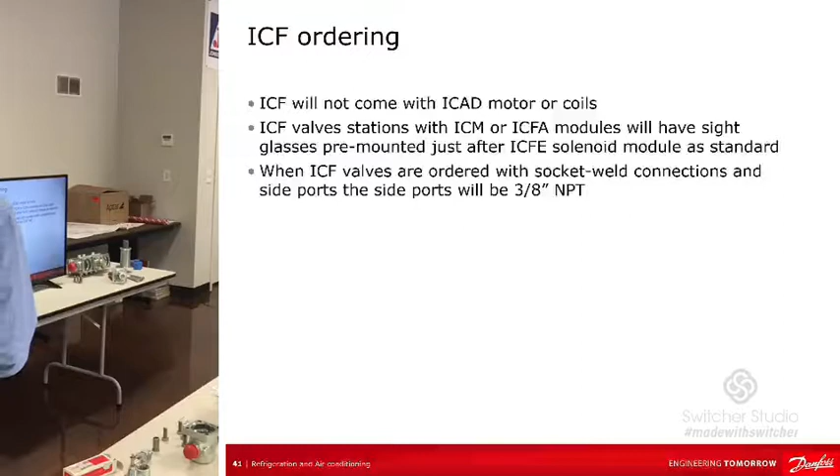The next is sight glasses. That's something new for us. They can be pre-mounted, and they're typically used for pulse electronic valves, modules, and ICM, so you want to see that you've got liquid there, and it's actually become very popular. It goes in that side port - the sight glass screws right in that side port. So you would put it right before the valve. When you order the socket weld connections, side ports are going to be 3/8 inch NPT with socket weld. If it's butt weld, then it's going to be a G connector.

Installation - this is pretty self-explanatory, we've talked about this a little bit. To the side and vertical is what you want. You don't want to flip upside down, because that's why we have that stipulation that certain modules have to go on top, some have to go on the bottom, but it is possible in the small ones to turn it sideways. When you have an ICM valve, we don't actually encourage that. It probably would not be a good idea. So you can see that in the last block there. So that's for the small.

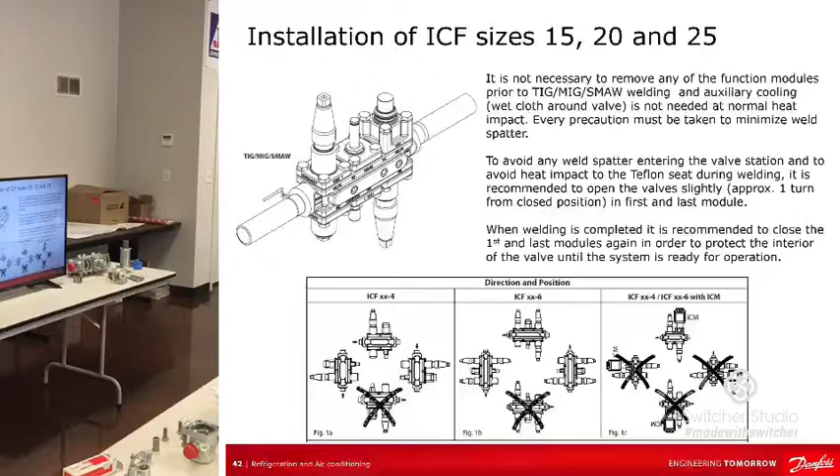For the large, horizontal. End of story - it's horizontal, that's what we recommend. So whether it has ICM or not, it doesn't matter. It's just they're physically so big, and the way they operate, vertical's just not a good idea.

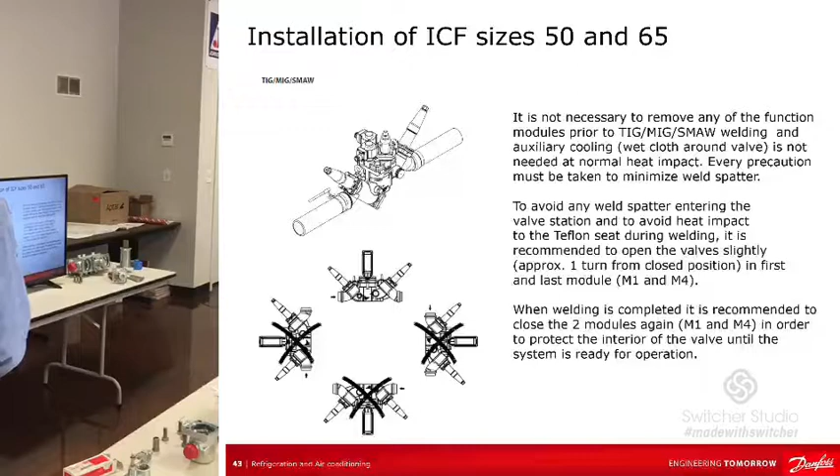So for servicing the valve station, of course, we've got 4-bolt common access to all the modules. It's all stainless steel. If you order that module to replace it, it's going to come with the hardware. Modules can be turned 90 degrees without affecting any functionality, with the exception of the ICFE 25 with the armature - it can only go 2 ways. Well, there's one exception to that: if you had a blank, which you typically would not have before a solenoid, it probably was not going to happen, but that's the only thing you could turn it then, maybe.

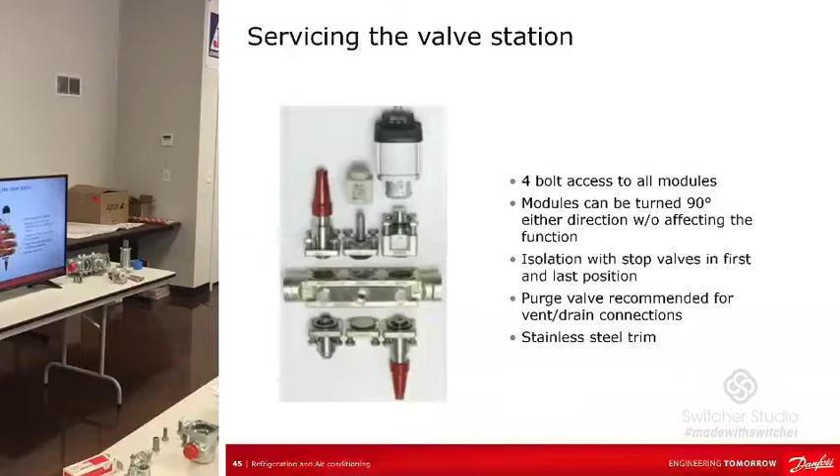So isolation with stop valves in first and last position normally. We recommend purge valves for vent and drain connections, okay, so the side ports, and then the filter module down below, which I just showed you.

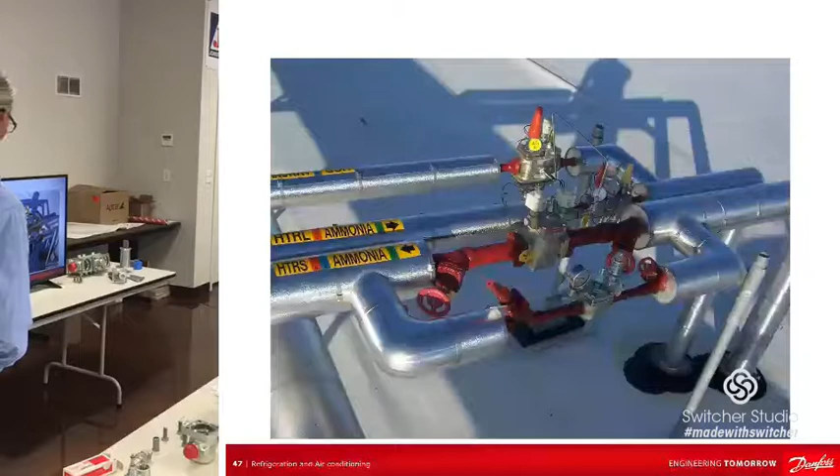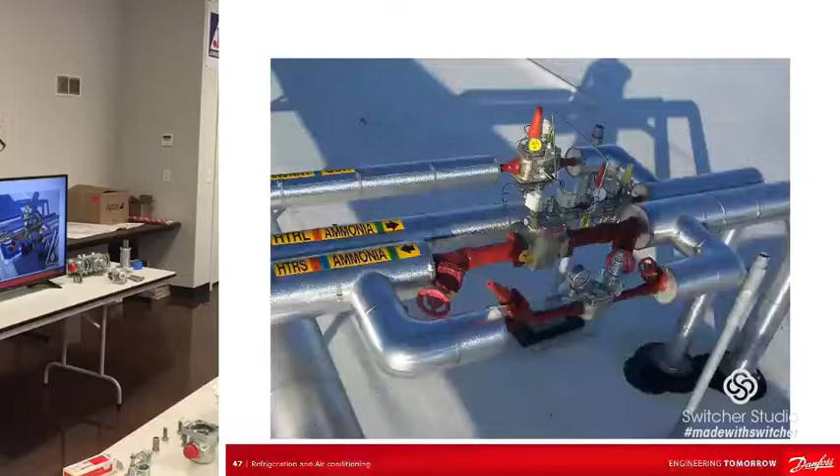Just an example of, this is an old, I say old because you can see flange, that's an old PMLX valve. But what you've got there is the suction in the middle with what would today be an ICLX, okay? And then you've got the hot gas there. Where's that? Hot gas is right here. And that's a valve station controlling that, and then your defrost drain regulator right there. So you got a 3-pipe system there.

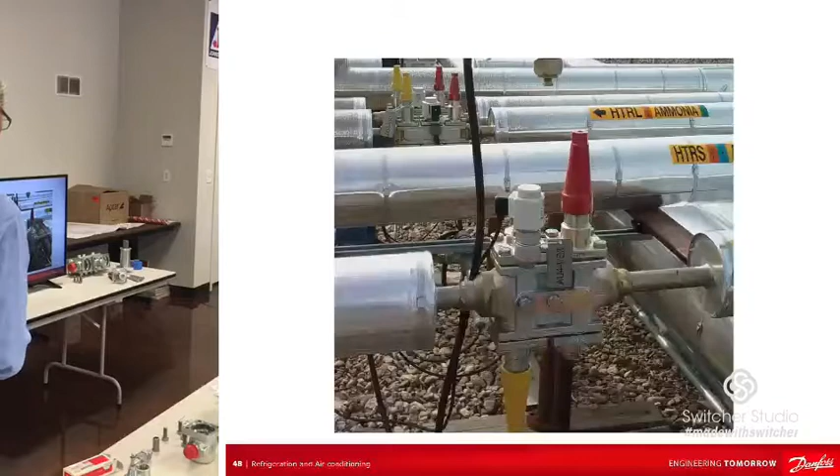Here is showing, that's hot gas, I believe. Yeah, see the suction in the background, liquid in the background. Yeah, that's hot gas, so control.

And then here, just an example of how, really I like the way this is done. So you've got all your evaporators that way, and then all your valve stations lined right up, feeding those for, you know, it's just really clean. So the guy needs to work on that stuff, he just walks right up on the roof and he's got access to it all the way up and down. It's really nice. Most times I see it in older jobs, it's clustered in big patches and you gotta go up and underneath and all over. So it's, I really like to see this. This is nice.

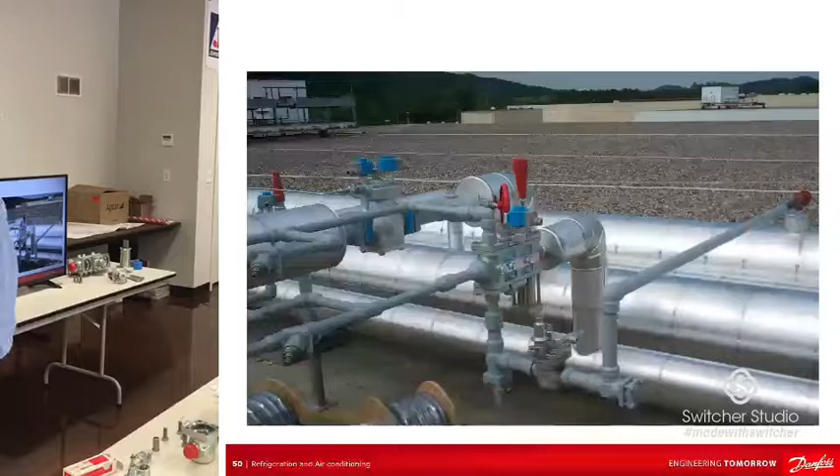Yeah, I know. So here's an interesting one that I came across out west. It's kind of interesting here. So this guy designed this thing, and he has 2 evaporators he's feeding, but he only wanted to use 1 ICF valve station. So he used 3 weld modules, and you can see it here. He's got one here, one in the one. Well, that's not a weld module. He's just welded to the valve station. Then he's got a weld module down here.

So what he's doing is he's feeding here liquid control, to his evaporators, and then when it's in defrost, he's got his condensate. You don't see the check valves here, but he's got the condensate coming back. So in defrost, that solenoid is closed, and it can only go one way, so it's going to go through that drain regulator right there and back to the wet suction. He got away without having to use 2 valve stations. I wouldn't recommend that actually, but pretty cool, I guess. I don't know, it's just pretty clever.

So a valve station that size is pretty costly. So let's say you did that 10 times in a system or 20 times, you could save a substantial amount of money as long as your flows and your capacities. And I'm assuming, I'm thinking this was actually small evaporators, it wasn't like big, huge. So we got away with it, but I'd never seen that before.

And you can see the example of what I run into all the time is he's operating on that a lot. So he's got the seal cap turned upside down on top of there. So something's going on with that. He's doing something.

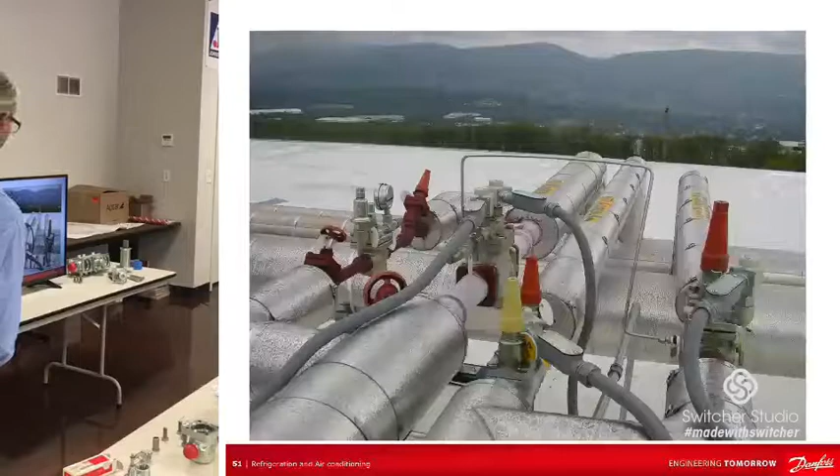And here's another one. You can see the nice fog in the background and the mountains. I don't remember where this is. But here in this picture, it's similar to what we had before, suction regulator, which is the old one, defrost drain, liquid, hot gas.

But the interesting thing here is liquid, you can see the yellow, and you remember what yellow is? Hand regulator. So a lot of times they use, on most, like there's not load changes or anything, you'll see the yellow cap valve station hand expansion valves. It's very common actually. If I run into, say, some where the load changes a lot, then they're going to use either electronic expansion valve or an ICM motorized valve or something like that for liquid control of the evaporator.